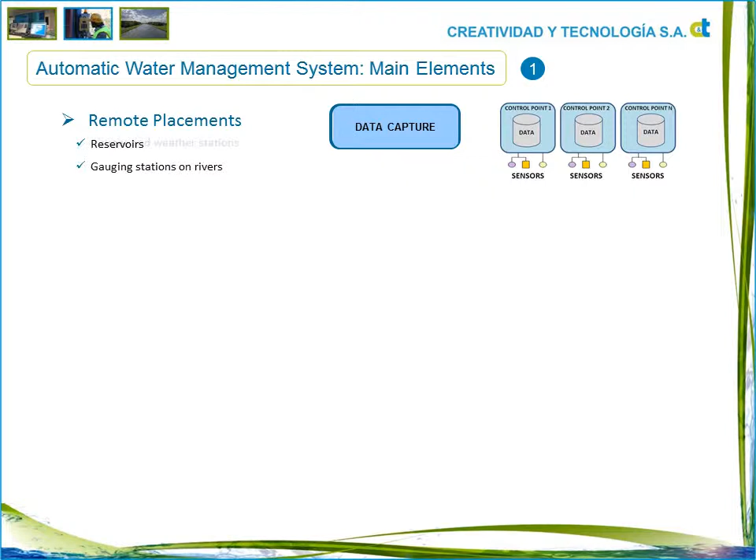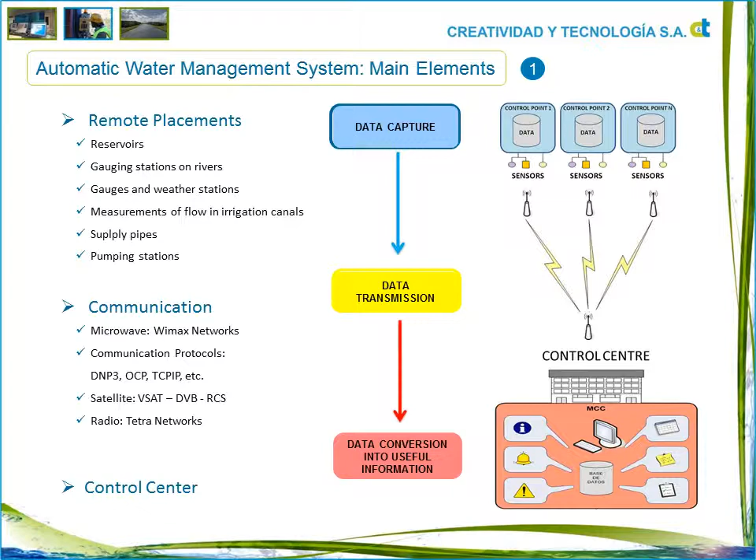This data is regularly sent through communication devices to a control center. It is then converted into useful information for the water management authorities, improving their decision-making processes. Complexity in designing automatic systems of water systems lies in defining, selecting, standardizing, and locating three main elements.

In order to place the remote control stations in the best location, a few actions must be taken. A deep analysis of the network topology. A careful selection of sensors and any other technology. The devices finally chosen will depend on several factors: the data that is going to be gathered, the acquisition process desired, the PLC algorithm designed for each action, or the validation tool used before the message is sent.

A proper selection of technologies and communication systems relies on elaboration of coverage maps, radio frequency studies and definition of their specific features, definition and standardization of communication systems and protocols.

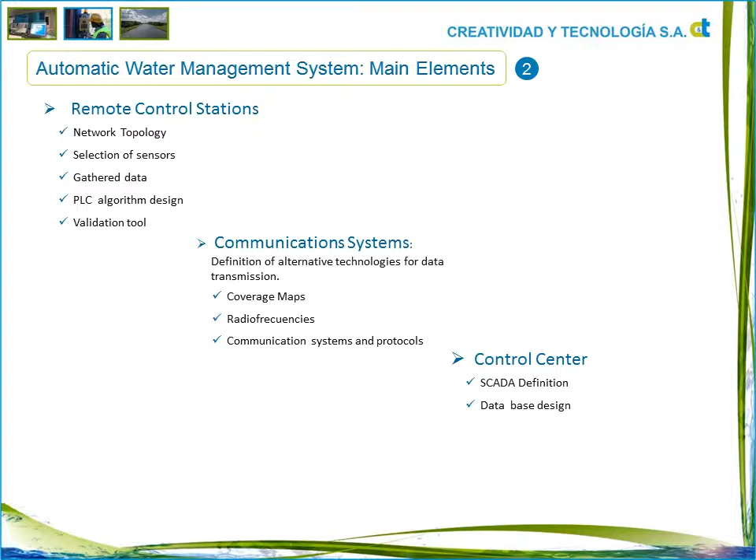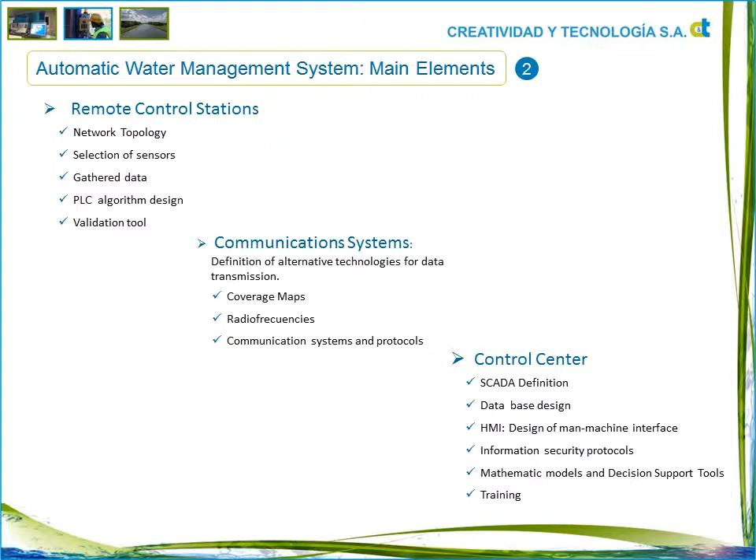Finally, development of an efficient control center requires a concrete definition of the SCADA device needed by the system, the database linked to it, the HMI, the information security protocols, mathematic models and the decision support tools. Finally, training of the staff in charge of monitoring and operating the control center is crucial.

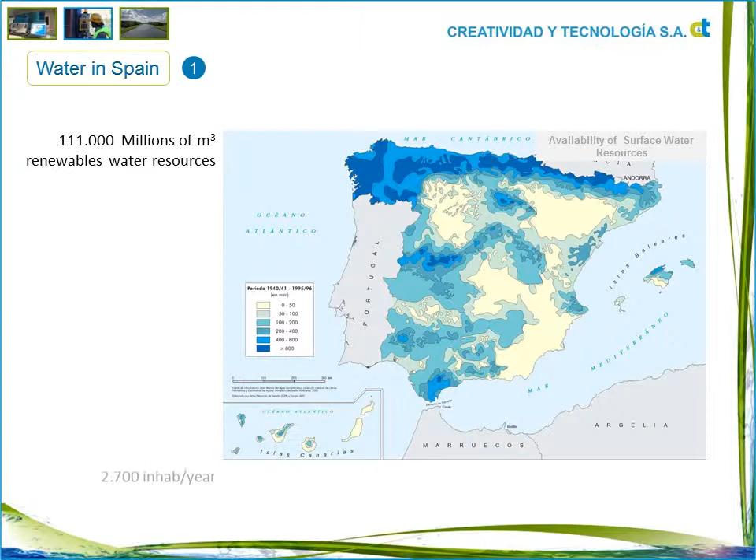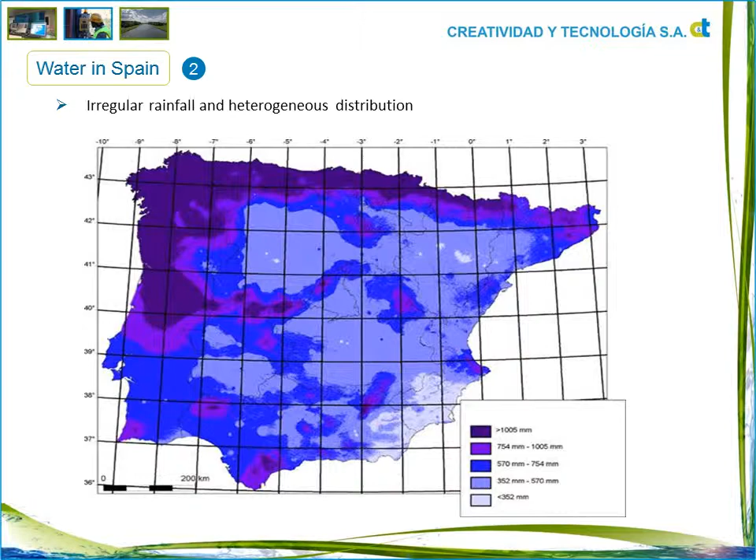Spain counts with approximately 111,000 million cubic meters of renewable water resources, meaning about 2,700 cubic meters per inhabitant per year. Water resources allocation in Spain is very heterogeneous in time and space. This is due to the irregular climatology and rainfalls along the national geography. In consequence, many extreme events such as floods and drought periods occur, putting at risk the water supply.

During the last 500 years, at least 2,400 floods have been recorded in Spain, leading in most cases to catastrophic results. Furthermore, during the period from 1950 to 1990, the annual average number of deaths rose up to 40, while economic losses have been estimated to be bigger than $1,900 million.

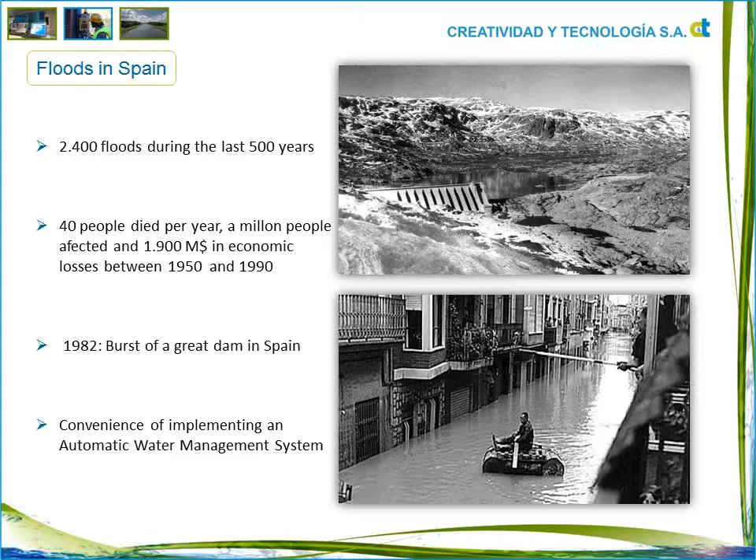In 1982, the burst of a great dam in the eastern region of Spain was a key incident that made the Spanish government realize the convenience of implementing an automatic water management system at a national level for each one of the different hydrological river basins. This was the starting point for the implementation of the first automatic water management system.

It was a pioneer project in Spain, being also the first of the large projects led by Creatividad y Tecnología since then. From 1985 until 1992, these types of management systems were successfully implemented along the eastern region basins, as they were the main regions with flooding risk. Since 1995, these systems were implemented in the rest of the country, this time including recently developed technologies such as satellite communications.

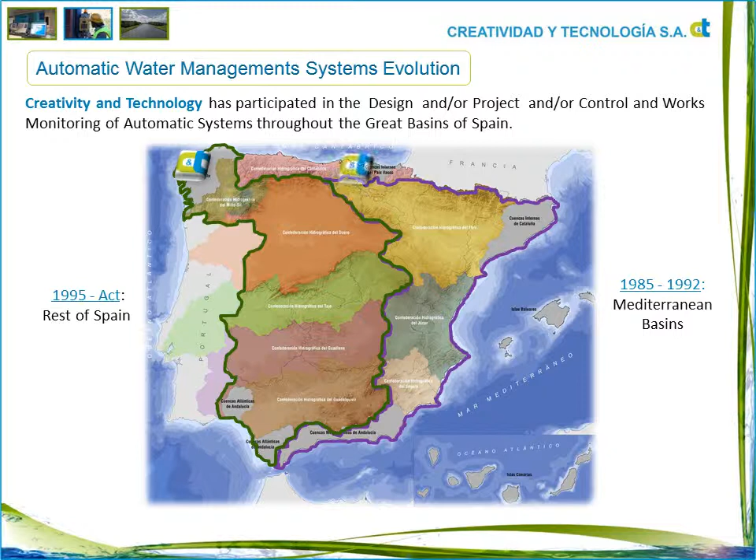This innovative initiative in Spain, as mentioned before, was led by Creatividad y Tecnología, who finally participated in designing, implementing, and monitoring all the big river basin plans in Spain. In the mid-90s, Spain suffered one of the greatest droughts until that moment, coinciding with the implementation of the Guadalquivir Basin Automatic Water Management System, one of the most affected regions regarding the drought.

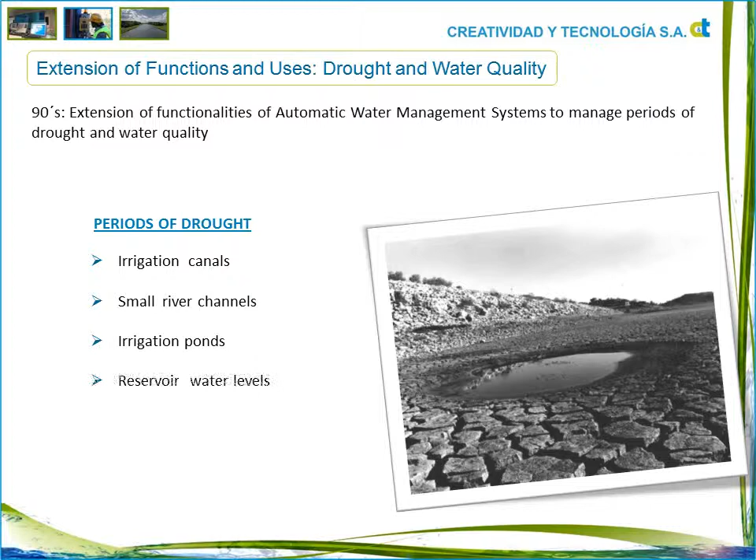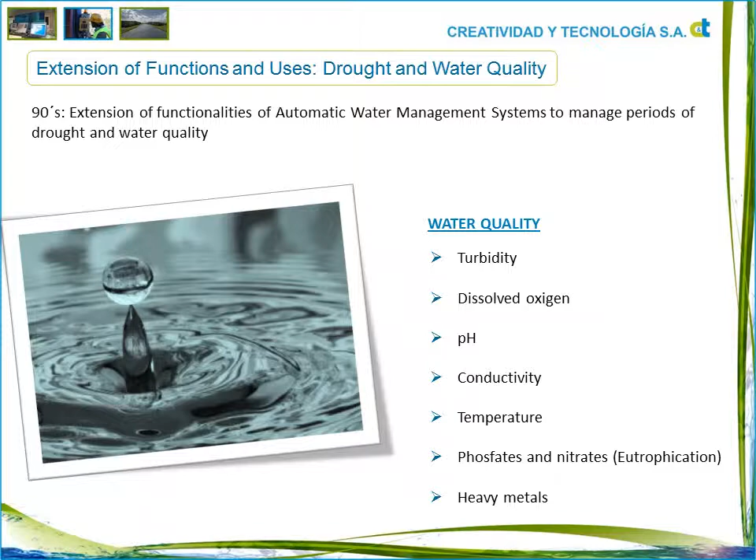It was in those days when the design of information networks was adapted and extended in order to provide data during drought periods. Once the huge potential and adaptability of these systems was verified, in 1992 the government decided to implement automatic water quality information systems in order to control several quality parameters, such as turbidity, dissolved oxygen, pH, conductivity, temperature, and others.

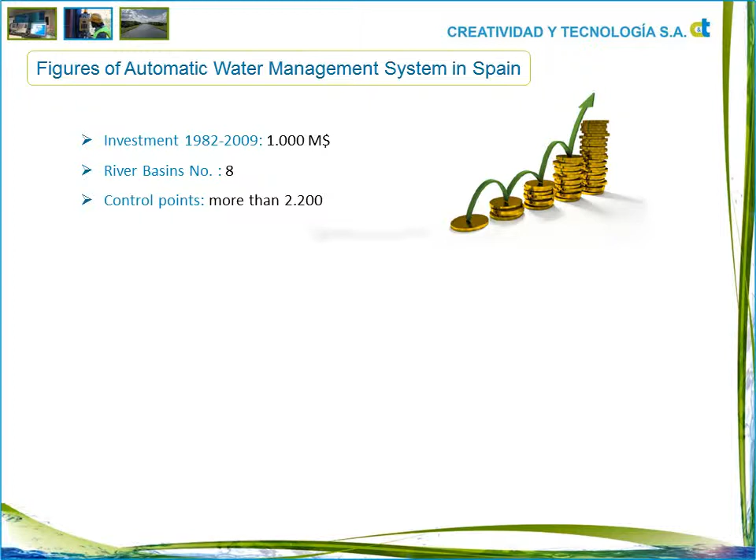Between 1982 and 2009, the total investment amount in the implementation of these technological solutions rose up to $1,000 million. This sum includes the civil works as well as the annual maintenance of the systems. During this period, these automatic systems have been put in place in 8 river basins and more than 2,200 control points have been installed.

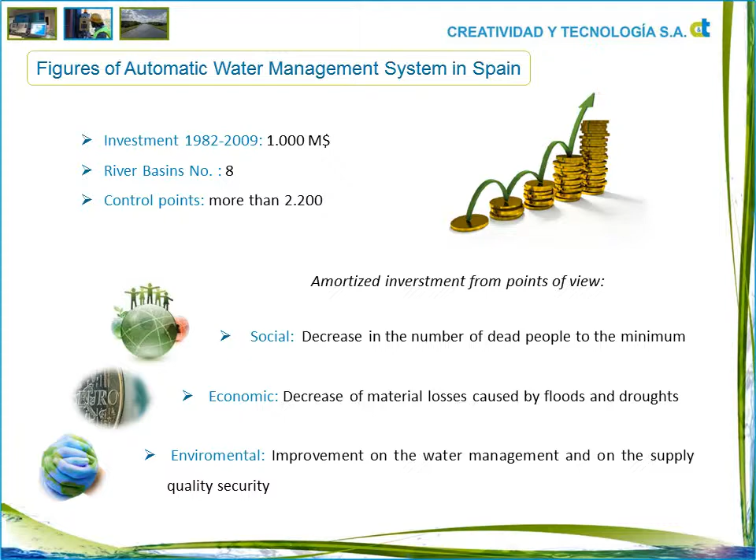The Spanish government considers that the investment has been completely justified and amortized from the following points of view: social, due to the decrease in the number of deaths to the minimum; economic, due to the decrease of material losses caused by floods and droughts; and environmental, due to the improvement in water management and in supply quality security.

Creatividad y Tecnología, a supplier of high-value technological services, has proved to clients that these systems are not only feasible, but also advisable in several contexts, such as hydrological planning and ecologic flows, integrating hydrological models, ecologic flows, public consultation online; integral management of the water cycle including exploitation models, decision support tools, hydrometeorological models, prediction models of contaminant diffusion;

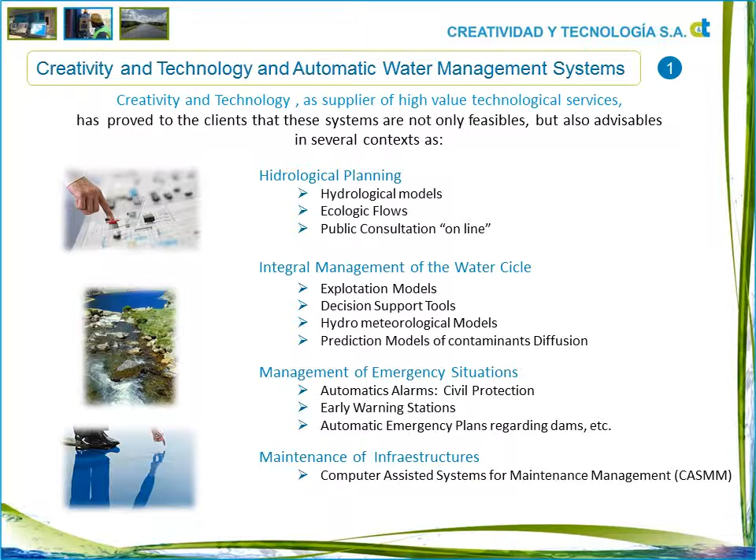management of emergency situations integrating automatic alarms, civil protection, early warning stations, automatic emergency plans regarding dams; maintenance of infrastructures, integrating computer-assisted systems for maintenance management. Moreover, the acquired knowledge regarding these systems has contributed to the management of the following elements: purification and sanitation, water supply networks, irrigation communities.

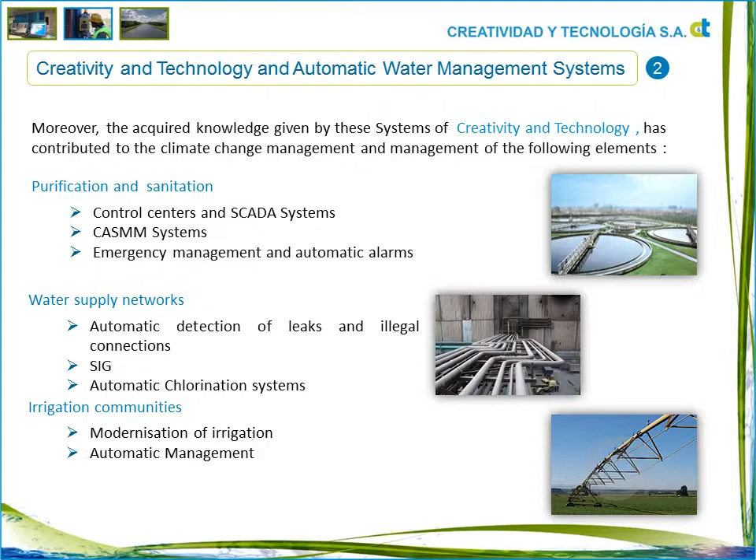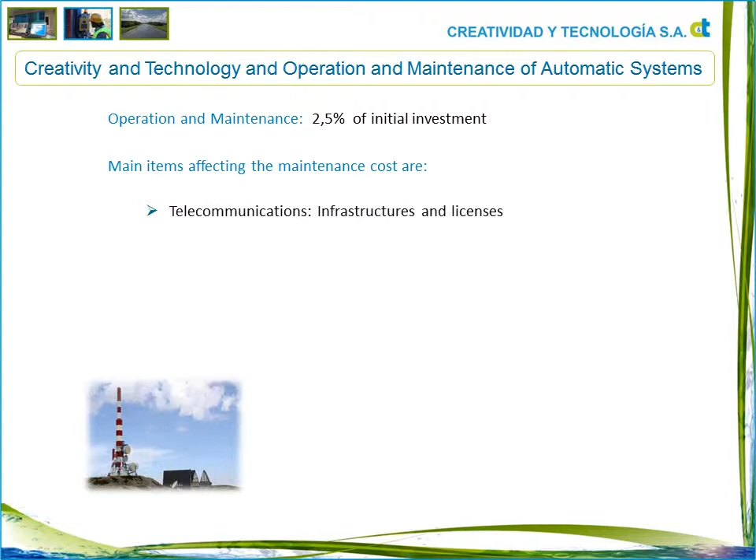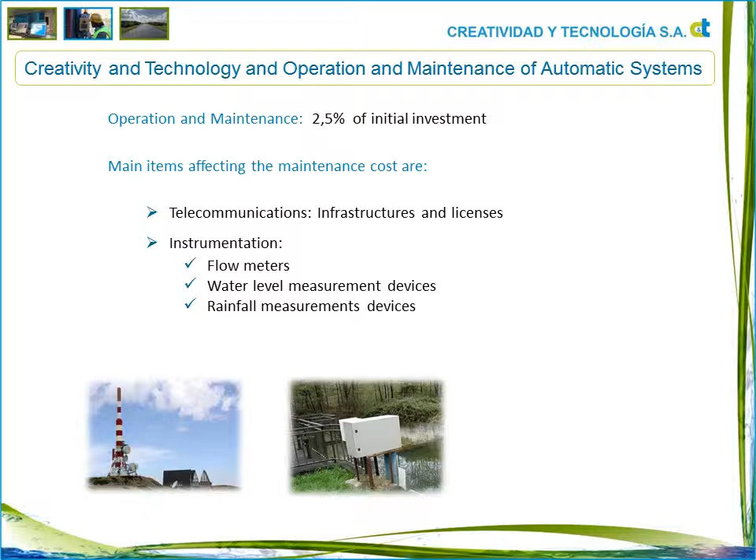According to the experience of Creatividad y Tecnología, the annual cost of maintenance concerning automatic water management systems amounts approximately to 2.5% of the initial investment. The main items affecting these maintenance costs are telecommunication, infrastructures and licenses, instrumentation, flow meters, water level measurement devices, rainfall measurement devices, software rights. All of them increase the cost of the maintenance process.

Creatividad y Tecnología pledges its commitment to independent design systems, avoiding suppliers' pressures and, therefore, coming up with flexible and versatile applications which are at the same time open, tailor-made, and cheap. Through such a concept, the following can be achieved: modular systems where new elements can be added depending on budget, client's needs, and technological feasibility and availability.

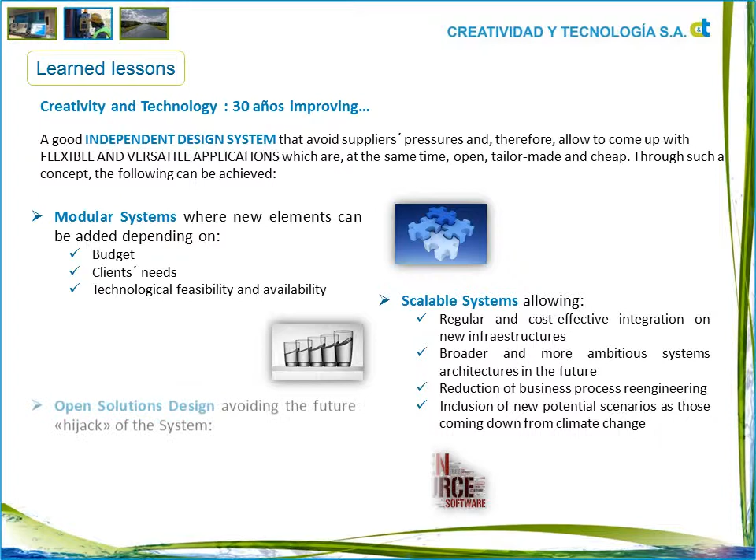Scalable systems which allow regular and cost-effective integration of new infrastructures, broader and more ambitious system architectures in the future, reduction of business process re-engineering, inclusion of new potential scenarios such as those coming from climate change; open solution design avoiding the future hijack of the system, open source solutions, open communications and instrumentation protocols.

Creatividad y Tecnología considers that the main challenges to overcome regarding automatic water management systems in the near future will be the following: extension of functions, smart basins, environmental costs, risk management. In 1982, the burst of a great dam in the eastern region of Spain was a key incident that made the Spanish government realize the convenience of implementing an automatic water management system.

European and American systems, so that international and global information networks can be developed. Integration of water information systems, such as smart basins with smart city platforms. Increased designs based on open solutions, standards and protocols. Promote independent designs against turnkey solutions. Look towards low-cost maintenance. In this presentation, we have analyzed why automatic water management systems are an essential tool for flood prevention, drought management, and integral water resources management.